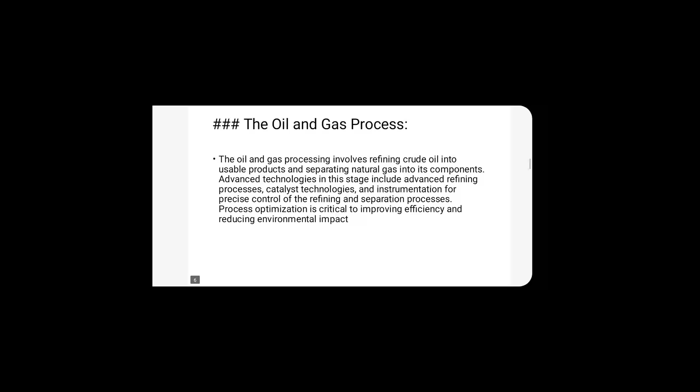So we look at gas processing and LNG, that's liquefied natural gas. That's our core area of concentration for today's class. I said that gas processing involves the treatment of natural gas to remove impurities and separate valuable components. When we subject natural gas to some form of treatment, we can take off the impurities and separate it into its natural components. The liquefaction of gas is because we want to be able to contain it.

Understand the characteristics of gas molecules: they are loosely bound, the van der Waals forces or the force of cohesion among these molecules are very minute, so it makes it easy for them to move randomly. As such, it's not easy to contain them, to handle them, to control them, to make use of them in that form.

So they need to be made into a liquid form so they can easily be contained, utilized, transported, or stored. And in doing that, according to Boyle's law, you can reduce the temperature, increase the pressure, reduce the volume. All right.

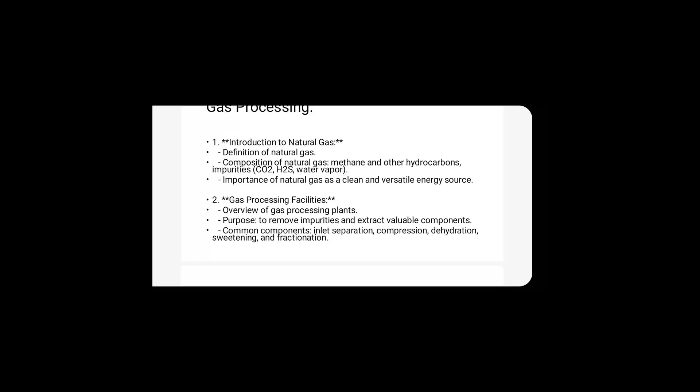So first, when we talk about gas processing, we have to understand what natural gas comprises of. Natural gas is mainly constituted of methane, which is the lightest product from crude oil. The composition also includes other hydrocarbon impurities, acidic gases like CO2 and H2S, and water vapor. These are majorly the constituents of what we get from natural gas that is not yet refined.

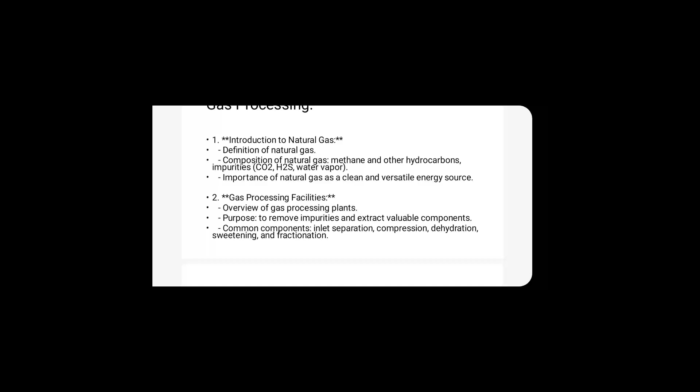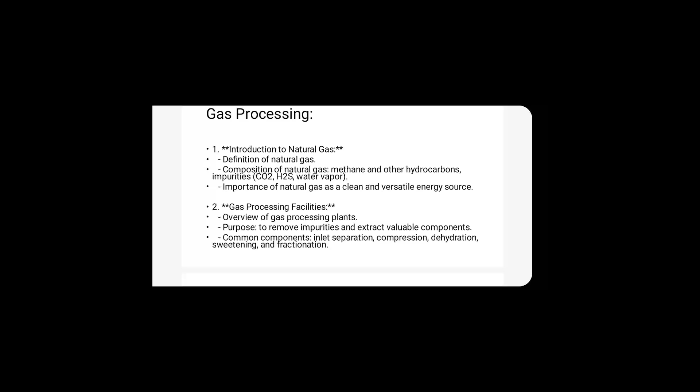So the importance of natural gas as a clean and versatile energy source cannot be overemphasized. This is because, if you understand the combustion process of hydrocarbons, depending on the level of combustion, for complete combustion you just have CO2 and water, that's H2O and CO2, which is not really hazardous to the environment.

But when there's incomplete combustion, which can especially result from the combustion of heavier compounds with insufficient oxygen, you have incomplete combustion. What you get is H2O and CO2 plus CO, carbon monoxide, which is poisonous and hazardous to the environment and to living things. The carbon monoxide, for instance, if it combines with hemoglobin, forms carboxyhemoglobin, which is dangerous to health and can result in death.

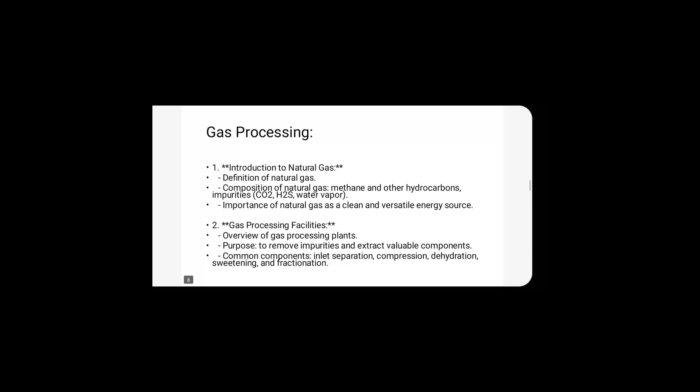As a result of this, it is very important that natural gas is made to go through a process of treatment to extract or remove these impurities that are constituent in it.

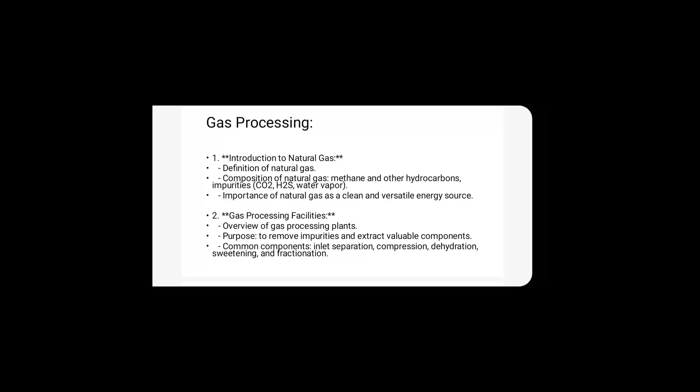However, natural gas is a cleaner form of energy because it's likely to undergo complete combustion. Hence, there is less pollution when you make use of natural gas as your fuel source, for our engines, for our systems, for other processes. Imagine cars that run on gases, for instance - you discover that they produce less sooty flame, they don't even produce soot from their exhaust. It's cleaner, it's purer, it's much better than other sources. So it's very important that we understand that.

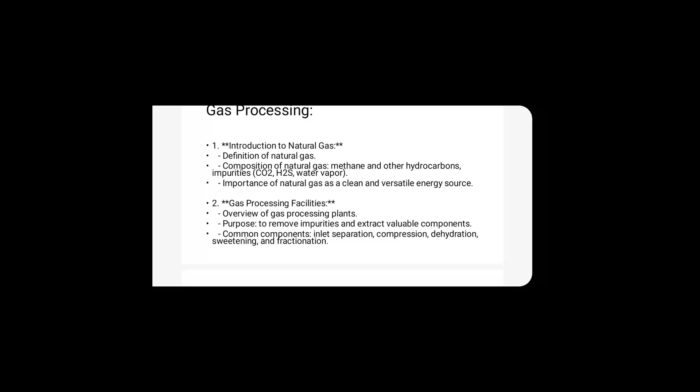And then the gas processing facilities - when we talk about these, we have the gas treatment plants, where processes of sweetening, dehydration, and extraction of all forms of impurities take place. Sweetening is the removal of sulfur or acidic constituents like CO2 and H2S. We'll be looking at that shortly.

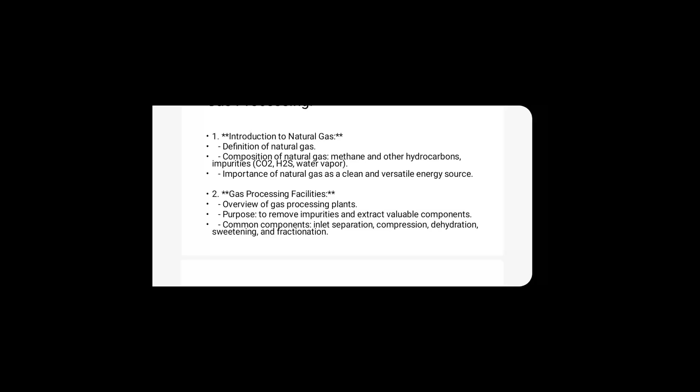There's also the part where water vapor is removed. This is done using the gas processing plant or treatment plant, and the purpose is to remove impurities and extract the valuable components from the constituents.

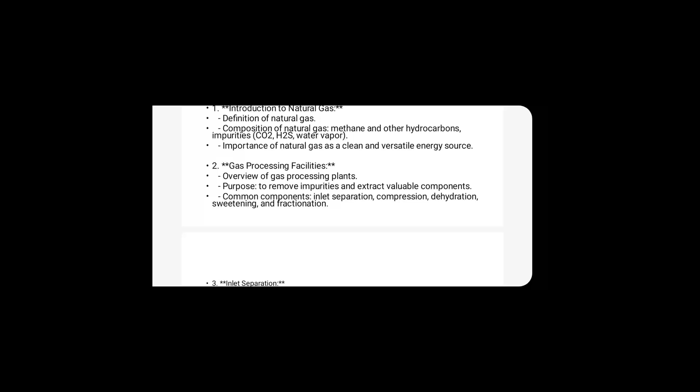And the common components in the processing facility include the inlet separation, the compression aspect where the gas is compressed, the dehydration aspect where water vapor is taken off, the sweetening section where acidic gases like H2S and CO2 are extracted, and the fractionation, where other heavier components are also extracted based on boiling point.

In the inlet separation, you have initial separation of the oil from water and impurities from the raw natural gas, because the natural gas is laden with some oils, water, and other impurities. So in the inlet separation, all these parts are extracted.

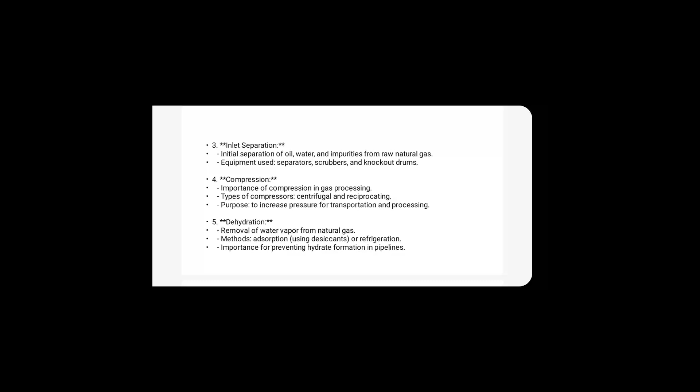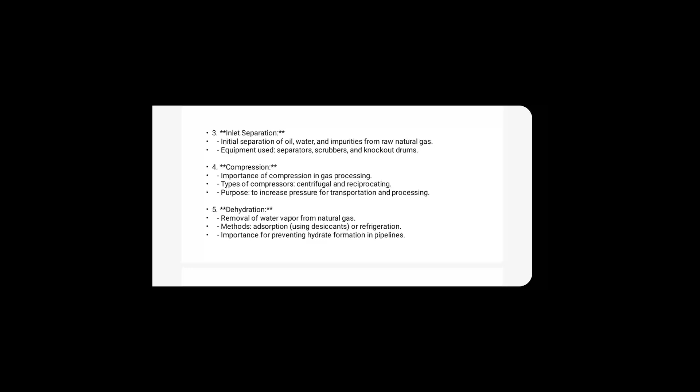The equipment used for this kind of operation are our separators. In a typical processing plant, maybe in our next class we'll see some pictures better, you see different types of separators for different stages - the low pressure separator, the test separator, high pressure separator, and extra high pressure separator. They are labeled as test separator, LP separator, HP separator, and SHP separator.

Then you also have the scrubbers and the knockout drums. The knockout drums are usually the last component before you get to the flare line or the extraction line for the gas.

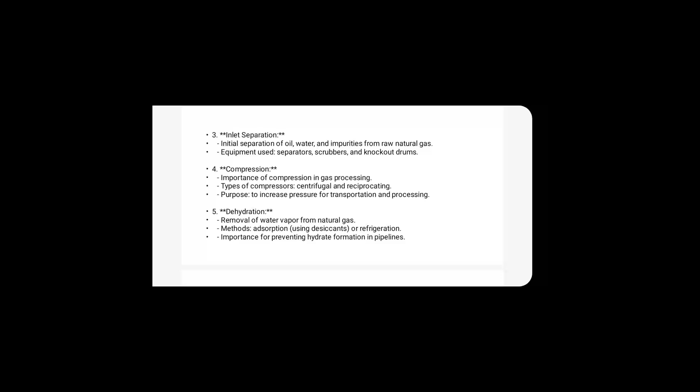They are made to pass through the knockout drum, which is often the last phase of separation - this applies to oils too, it's still the same process. There are also separators, where the constituents like the oils and vapor are extracted, and the rest are recycled back into the separator for further separation or collection.

So what's the purpose of compression in gas processing? Like I said, it's to enable handling, storage, or transport. Compression is a process used to help liquefy the gas, done by increasing the pressure, reducing the volume, and reducing the temperature.

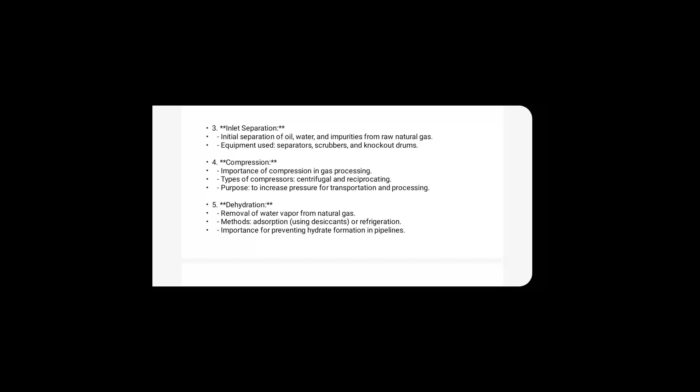Now we'll look at the types of compressors. We have two major types: the centrifugal and the reciprocating compressor. The centrifugal compressor works like a centrifuge - that's the principle it uses in compressing.

And what is the purpose of compression? It's to increase the pressure for transportation and for processing of the products.

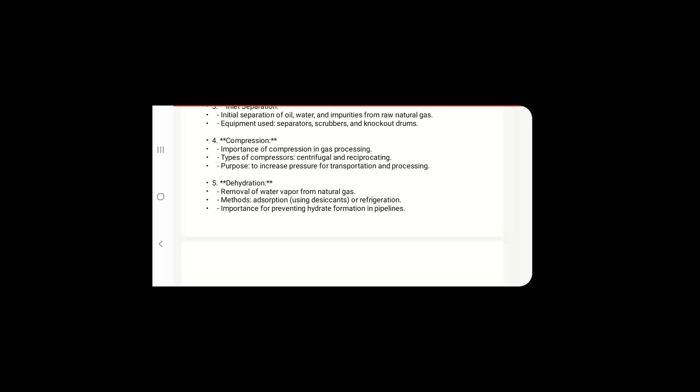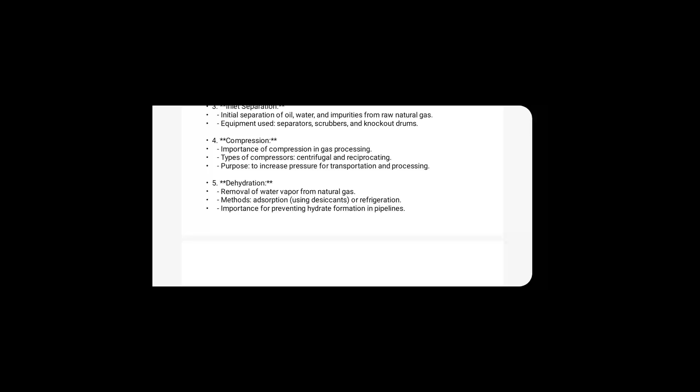When we talk about dehydration, we are referring to the removal of water vapor from natural gas. The methods used are basically adsorption - the use of desiccants to absorb the water. The gas is made to pass through a channel or chamber with desiccants, which won't absorb the gases but will absorb the water vapor in them.

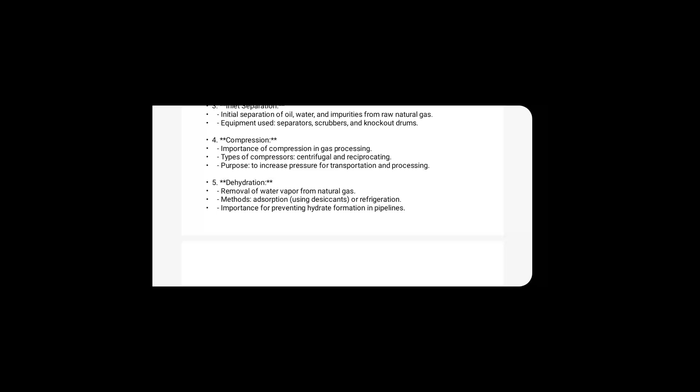Or we use refrigeration, which is the act of reducing the temperature. By reducing the temperature, separation happens by the principle of density differences - water vapor is denser than the liquefied form of the gas. So the refrigeration process works based on temperature reduction.

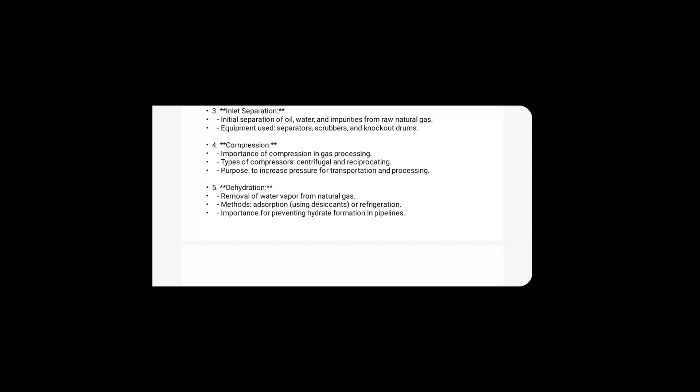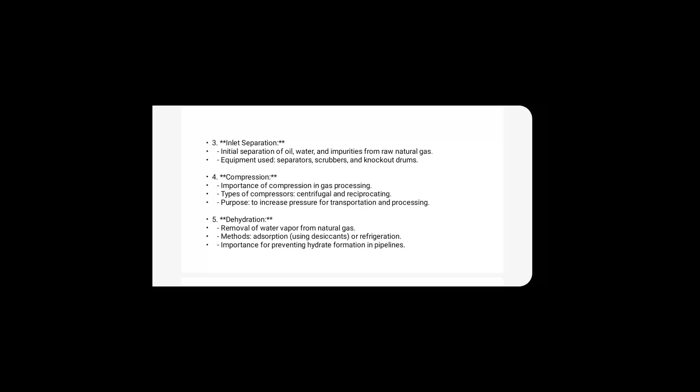The importance of preventing hydrate formation in pipelines cannot be overemphasized. Hydrate formation can be very hazardous for transportation of products in the pipeline, because it eventually forms blockages or deposits, making it more difficult for the line to transport the volume or flow rate as designed.

What happens in such a case is a drop in pressure, and in some cases a high level of impurity in the products. So how do we prevent or reduce hydrate formation? By carrying out proper separation at the processing station to reduce the level of hydrate formed, and ensuring the pressure and temperature at which the fluid flows down the line is maintained at the designed operational level to avoid hydrate formation.

These processes can be simulated, and software like HYSYS are used to simulate this, giving us the best temperatures, pressure, and other variables necessary for this to be done without resulting in hydrate formation.

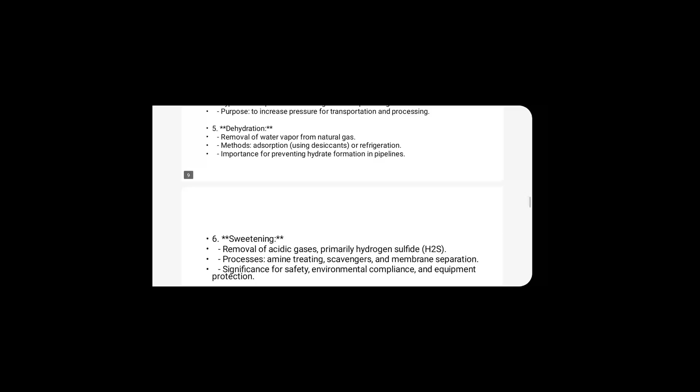From there we talk about the stream sweetening process. Sweetening is the process of removing acidic gases, primarily hydrogen sulfide gas, from the fluid. These acidic gases can be very poisonous and hazardous to the components of the refinery and equipment - they can lead to rapid corrosion of the steel components, causing quick degradation of the facility and quantum loss over time.

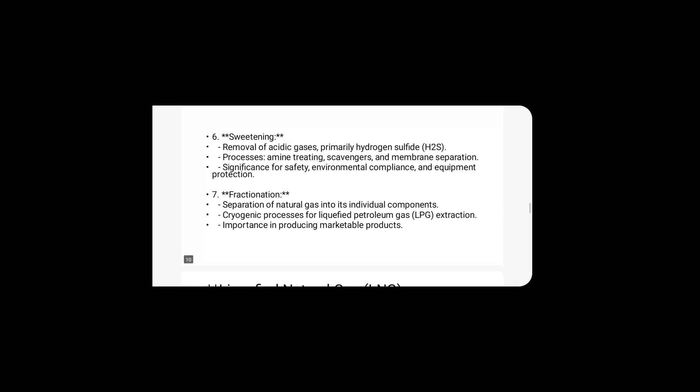It can also be very poisonous to health and very hazardous to the environment. So one sweetening process is amine treating, making use of amino compounds to carry out the treatment. We also have scavengers - the scavenging process is part of it - and membrane separation, using membranes as a separation system for this purpose.

So the significance of safety and the equipment cannot be overemphasized. These processes must be carefully done, and the gases must be stripped of these hazardous constituents, especially the hydrogen sulfide.

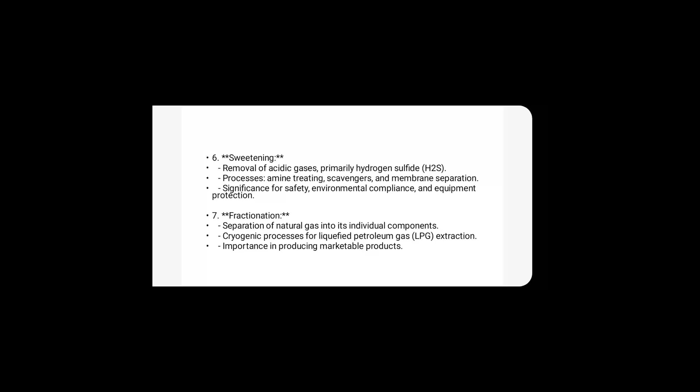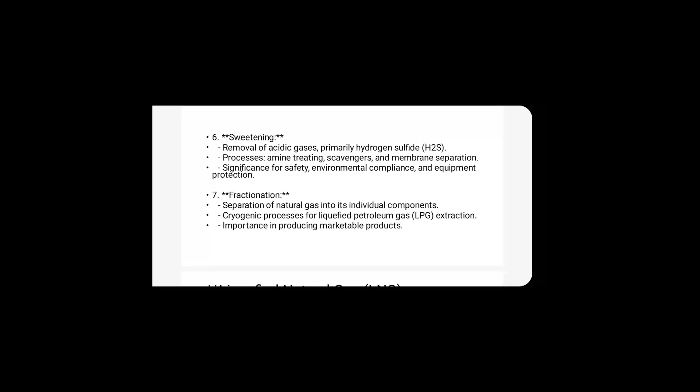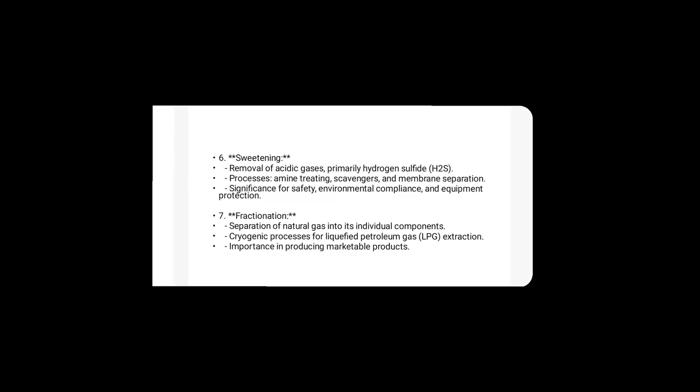It will help protect the environment because the sulfuric constituents, as earlier mentioned, are very poisonous and hazardous to the environment, and also dangerous to equipment, leading to quick corrosion. There's also the safety aspect for health, as it can be harmful to the respiratory system, carcinogenic, cause respiratory defects, burns, and skin reactions, among other negative impacts.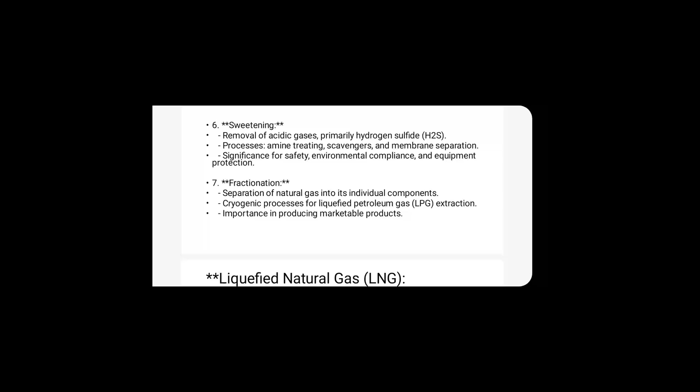Fractionation is the separation of natural gas into its individual components. We have the cryogenic process for liquefaction or liquefied petroleum gas extraction, which is important for producing marketable products. This separation through the cryogenic process is mostly used for liquefied petroleum gas, comprised majorly of butane and propane. We'll throw more light on this in our subsequent lab.

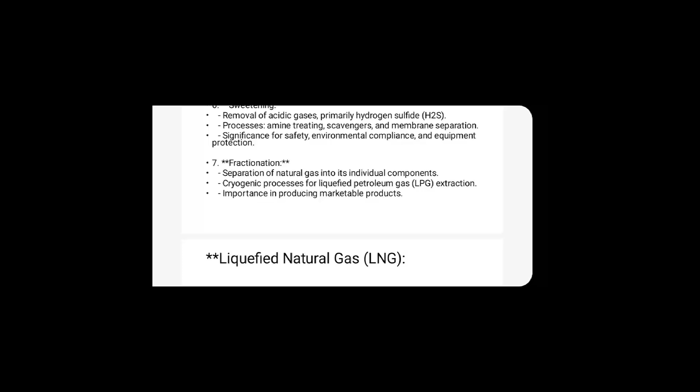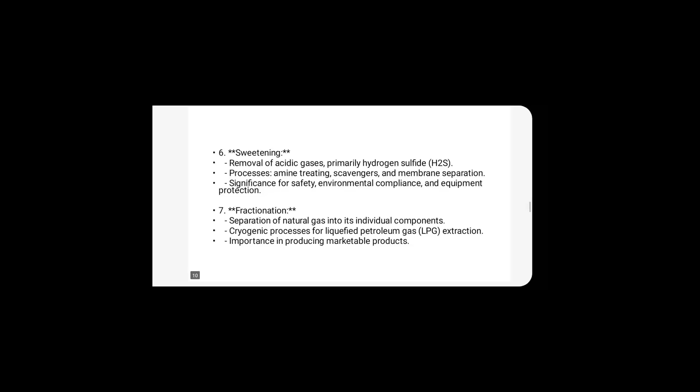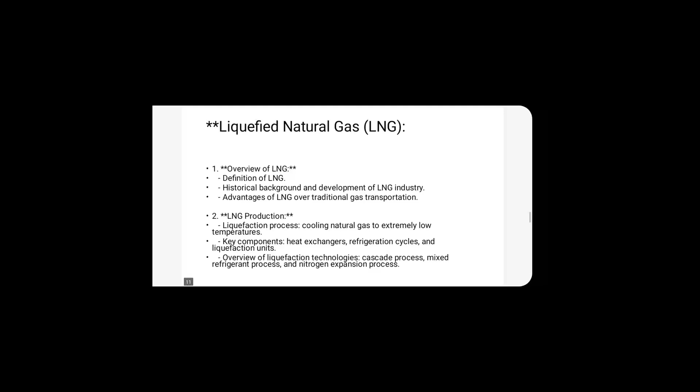As we said earlier, if your product is laden with sulfur or other hazardous constituents, the product will have less value in the market, whether gas or oil, because of the cost-intensive nature of processing and purifying it, or sweetening it. This usually brings about low market value for such products.

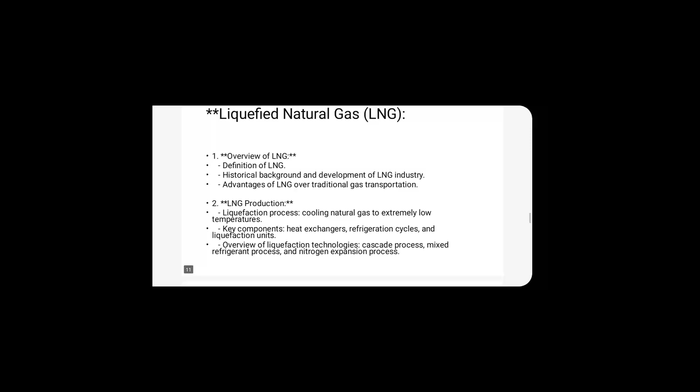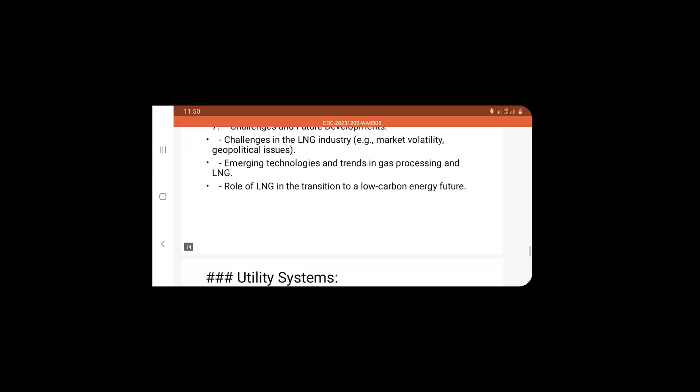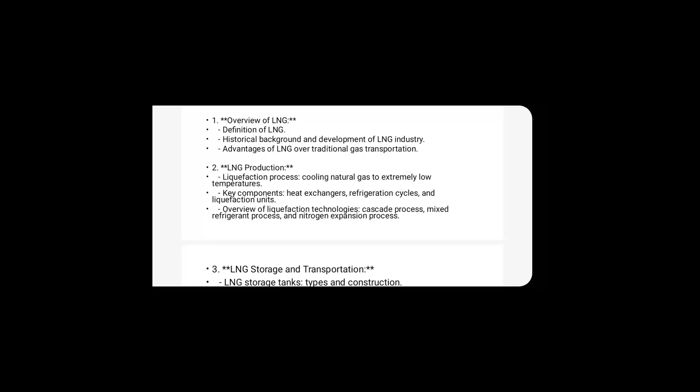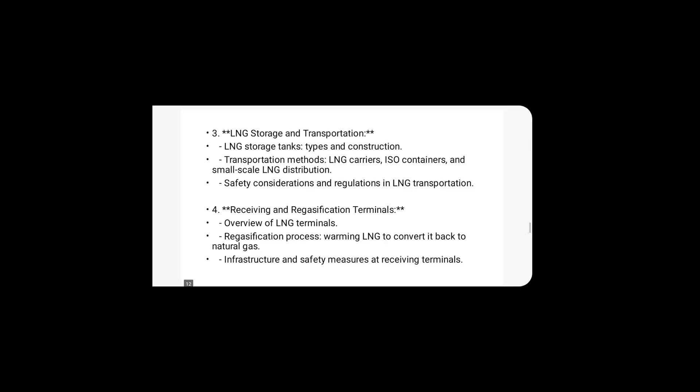So very quickly, let's also look at the storage and transportation of liquefied natural gases. We have to look at the types of storage tanks—basically spherical kinds of storage. Like I said before, the kind of storage used for gases is not the same as for oils or liquids.

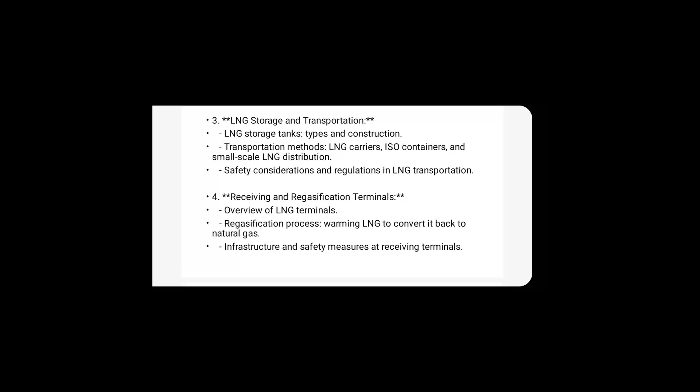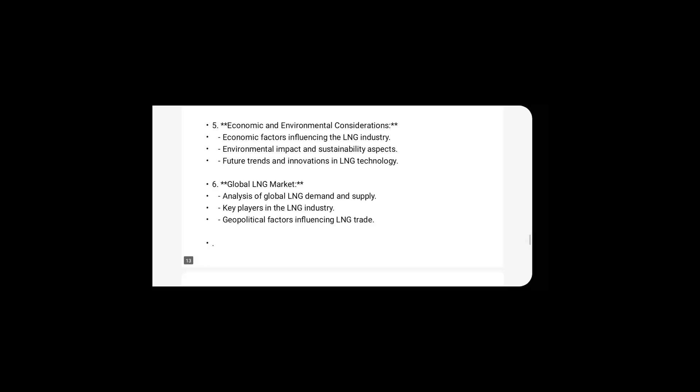That's because of the nature or composition of this product, to ensure that their liquefied state is maintained or sustained. It's very important that they are kept in specially designed tanks, mostly spherical in shape. Now, we've talked about the global market, and we'll look at the challenges and future development challenges in the liquefied natural gas industry.

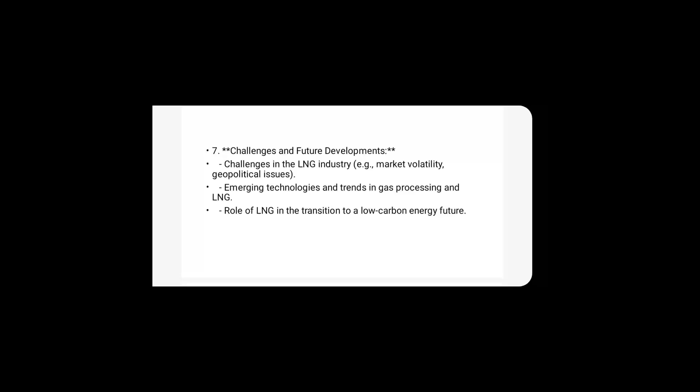The volatility of the market is one of the major challenges, because the market is very volatile and prices fluctuate randomly. For those of you who make use of cooking gas, you'll attest to the fact that in the last few months you've seen a crazy trend in the increment of these gases. It's something that has a global effect too.

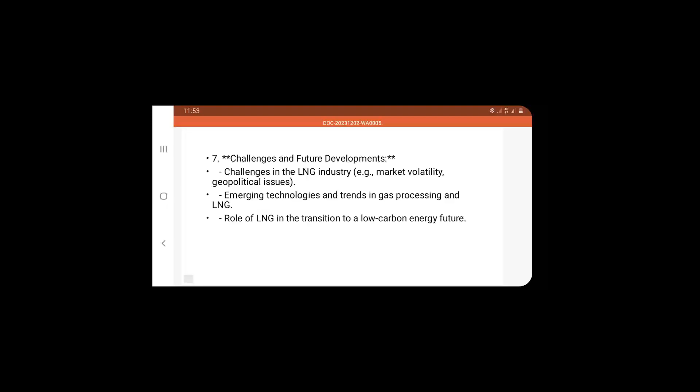The geopolitical issues involved in this industry cannot be overemphasized, in terms of sales, transportation, location, utility, and the trade policies involved from one country to another. A lot of emerging trends in the processing of gas aim to make the liquefaction process safer and easier—more designs, less risky processes are being invented or researched to make it much easier.

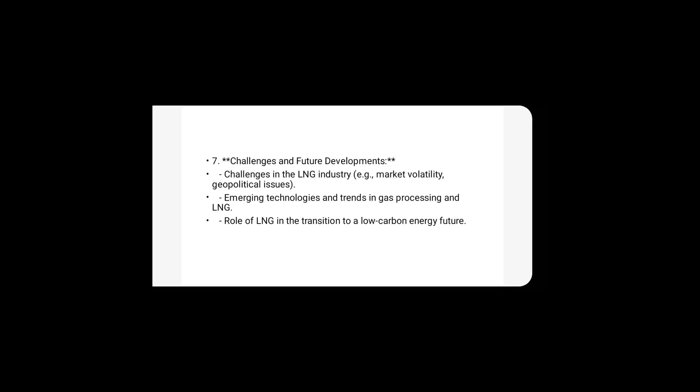The role of LNG in the transition to a low carbon energy future cannot be overemphasized. As I said earlier, LNG presents a cleaner source of fuel for the oil and gas industry, because we can have combustion and these processes done with little or no environmental pollution, especially when the gases have been stripped of their basic impurities—since liquefied petroleum gas and liquefied natural gas are lighter fractions of hydrocarbons.

So when they undergo combustion, it is easier for them to combust completely, experiencing a complete combustion process. This means cleaner end products are produced, namely water vapor and carbon dioxide, which is not hazardous to the environment. These are areas being looked into to improve the impact on the environment and create a safer, cleaner energy source for the ecosystem.